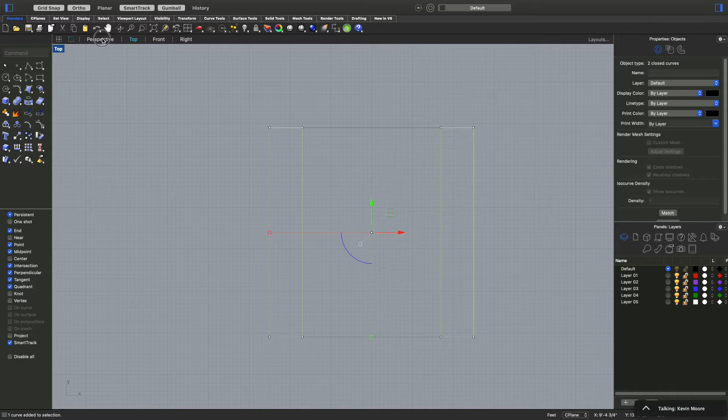You can select them both and go back into perspective, extrude them up, and maybe I'll do 2 inches.

Okay, and let's go ahead and maybe do a polygon. Why not? It still has straight lines. Polygon, 5-sided, sounds good to me. So number of sides you can change right there.

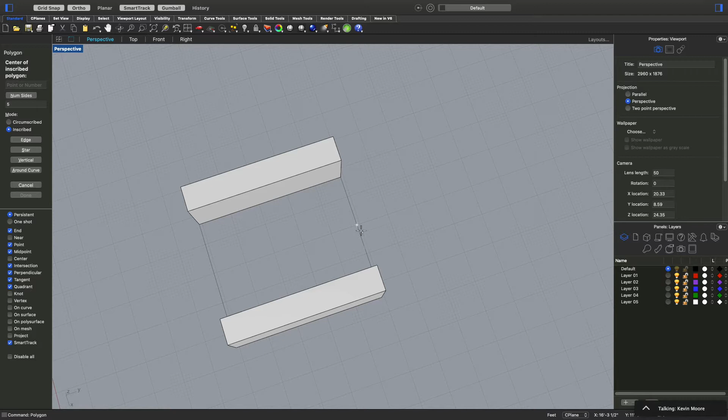Do it in the middle. And then extrude, curve up. Maybe make this 1 inch. I'm just keeping these basic dimensions, 1/2 inch, 1 inch, 1/4 of an inch. You don't want anything thinner than 1/8 of an inch.

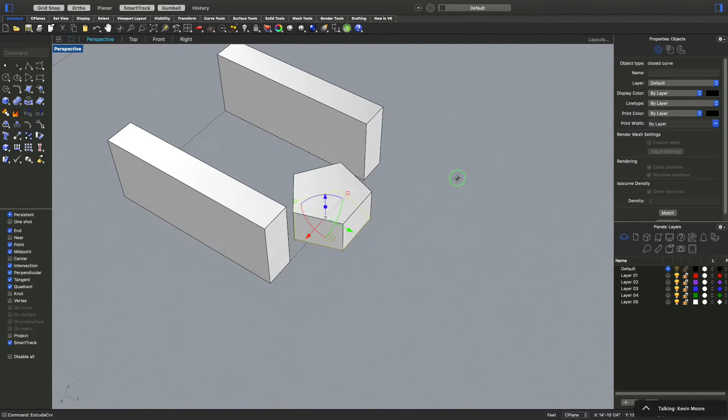And try to keep them kind of round, that helps too. So now I'm going to move this to the middle. The way I'm going to do that actually is move, enter, click on the object, enter. But don't click on the object to move it.

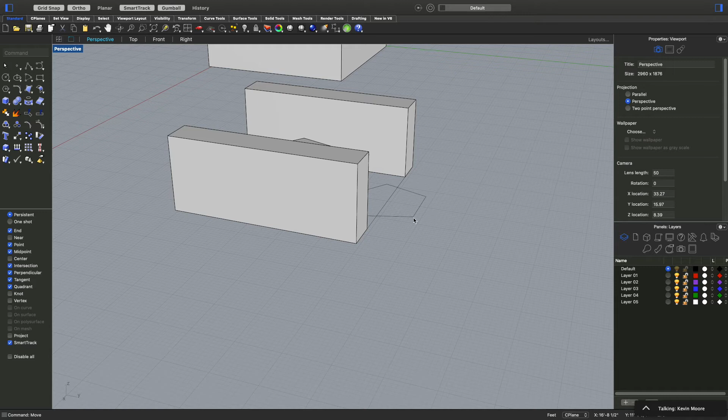I'm going to click over here, click from here, and then find my midpoint on this spot. That way I know I moved it to the middle. So I'm just displacing it by this point to the midpoint to get it nice and centered.

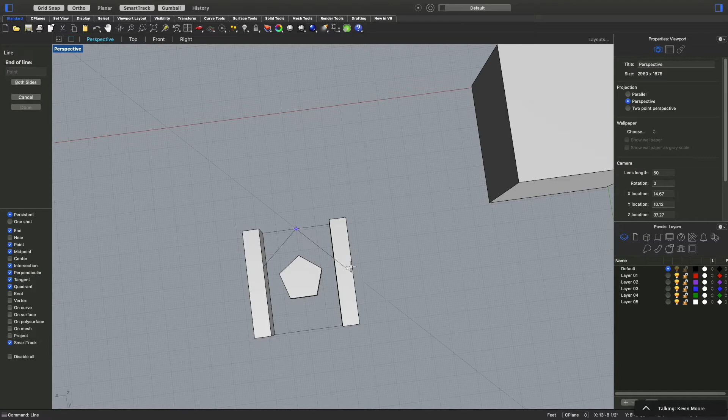Might want to do some more shapes. From midpoint here to midpoint there. See, my lines got all out of whack here. From midpoint to midpoint, midpoint to midpoint.

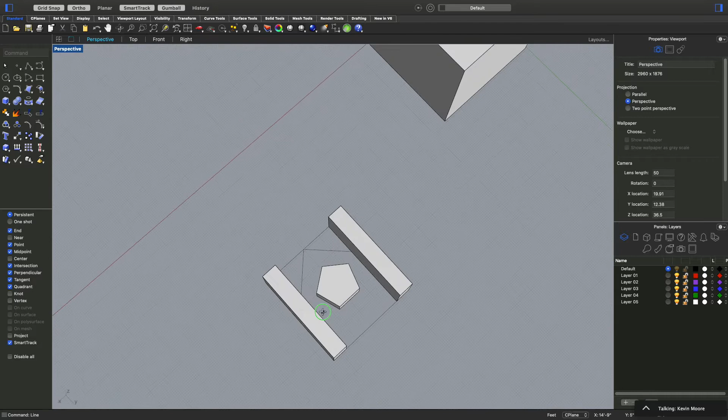I need to close these lines off, so you have to make a complete body. So I'm going to do a polyline, from this point here to there, enter. And then I'm going to join these two.

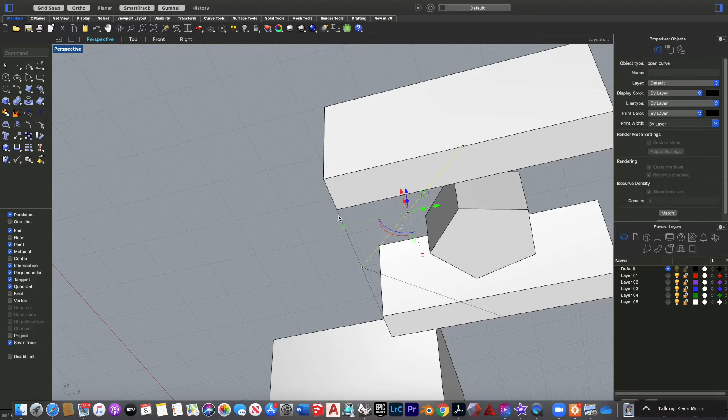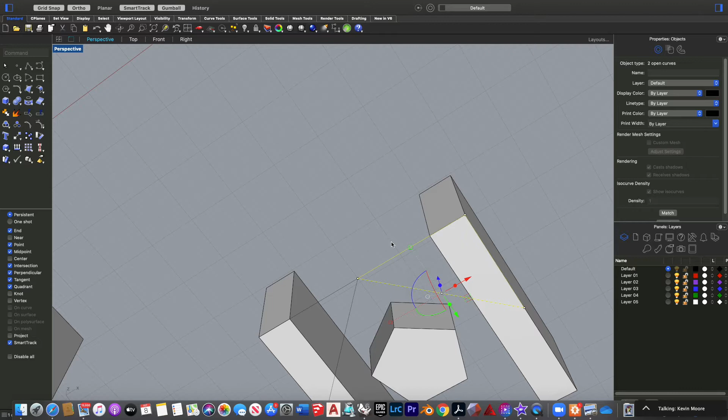You see when I click on this one, there's two lines here. So if I shift click to add to the selection, it gives me the option of which one to choose. This is the one I want. And then I'm going to join that together. I'll extrude that all the way up.

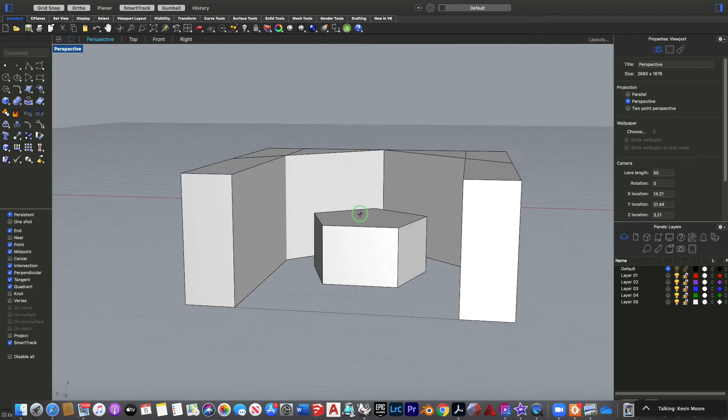And I can do that process again or mirror. All right, so I'm going to just take this simple form in here, and this is just kind of a trial. I'm going to Boolean union this together and make it all one piece.

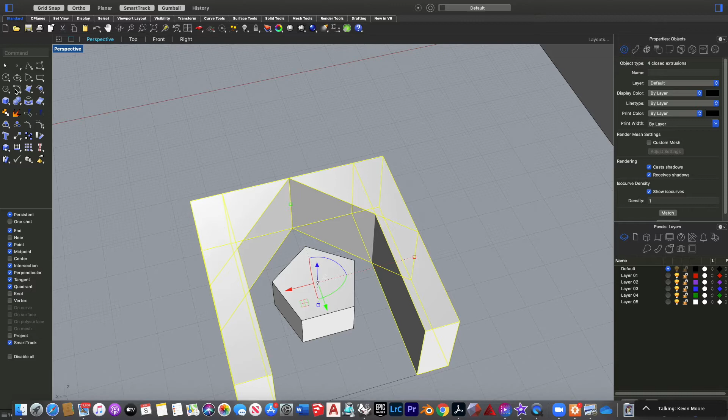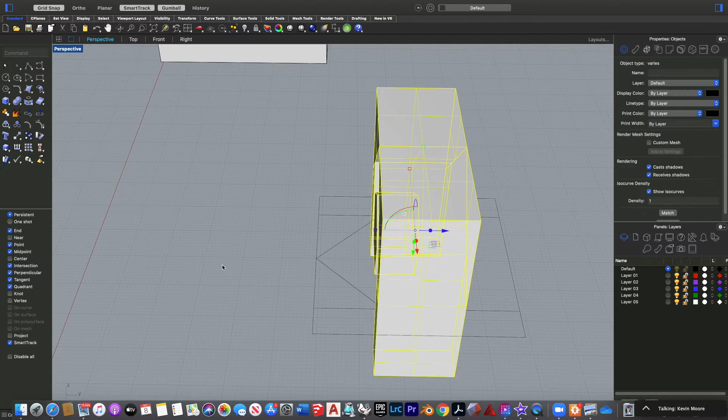So we use Boolean union, okay. And then I'm going to take these two, select them both, shift select, and I'm going to flip it up 90 degrees. I have my snap or my ortho turned on so it rotates properly. If you don't have ortho on, when you turn it off, it rotates at any direction, but if I hold down shift, then release, it gives you the same effect.

But I decided actually I also want to, I made this 5 inches I believe, so I want to offset it 1 inch. So I'm using offset, enter, or offset, enter, 1, enter, click.

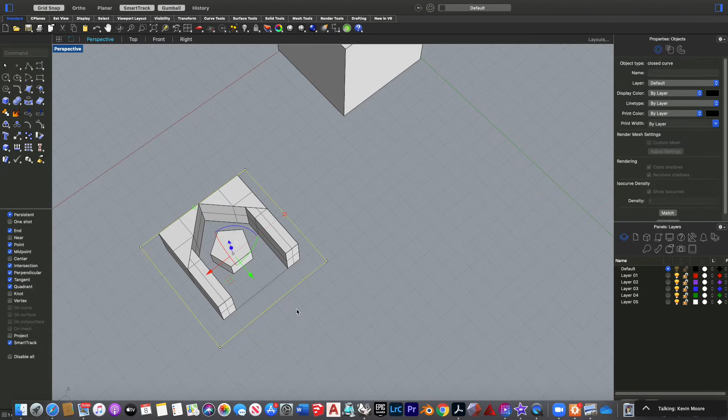Let's measure it, so use dim for measurement. Go from here to there. That's too much. Offset 0.5, enter, click there. All right, that's right. So now I can use these two together as guidelines.

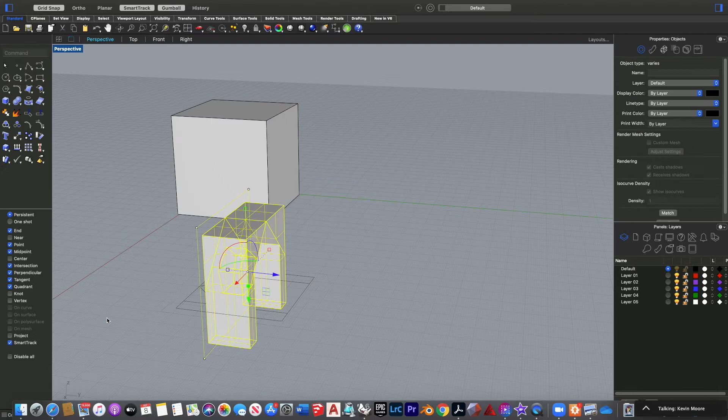So this, selecting that curve and the geometry, flip that up, shift click, and then I'm going to use that curve in conjunction with my object to move it onto one of the faces. So I grab that little edge right there on the curve, right there, and marry it up to right there.

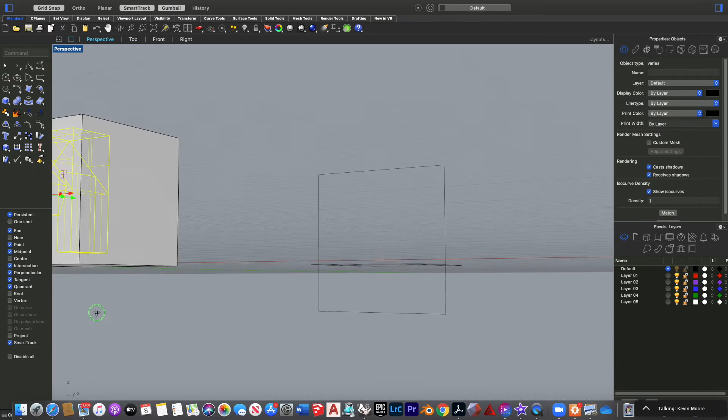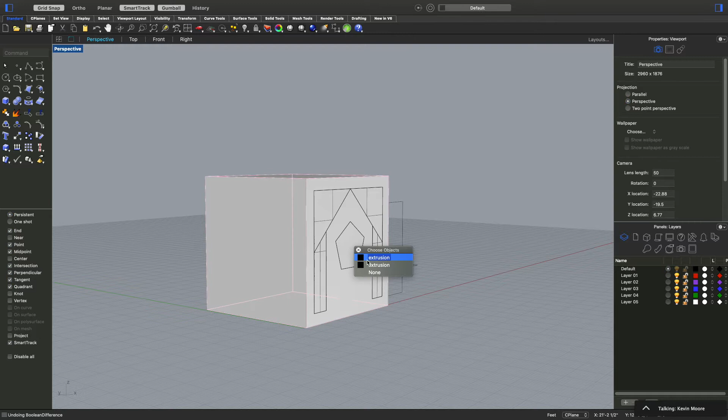Okay, and then let's Boolean difference. Keep this, enter, get rid of this, and this, enter. And sometimes it's a little problematic. It's okay though, if it doesn't work the first time, let's go to a top view and see.

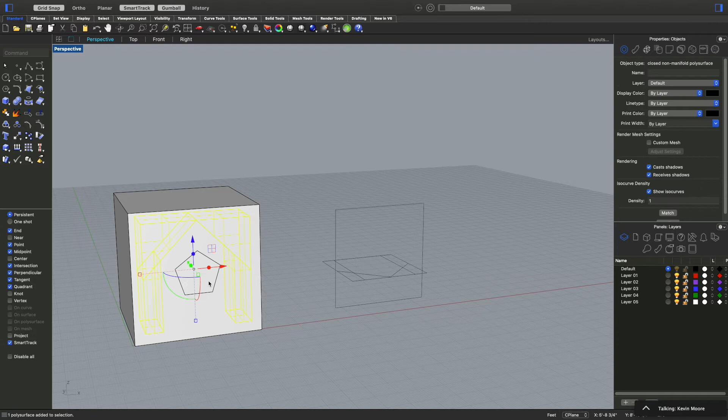So let's do it one at a time. Boolean difference: click on this to keep, enter, click on this to remove, enter. That worked.

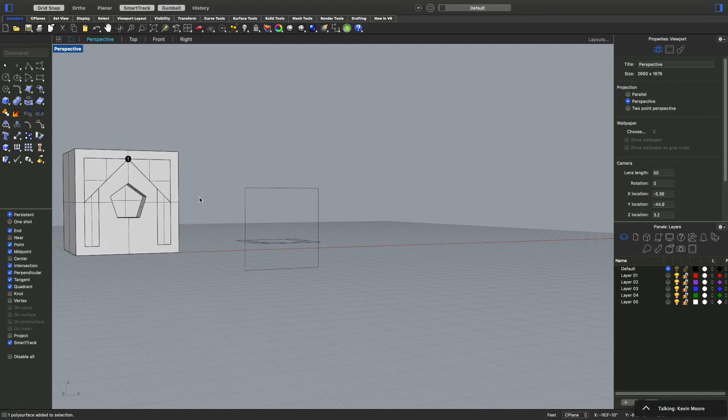Click on this to keep, enter, click on this to remove, enter. Does not work because this little section right there is meeting in a weird way. So let's go ahead and undo.

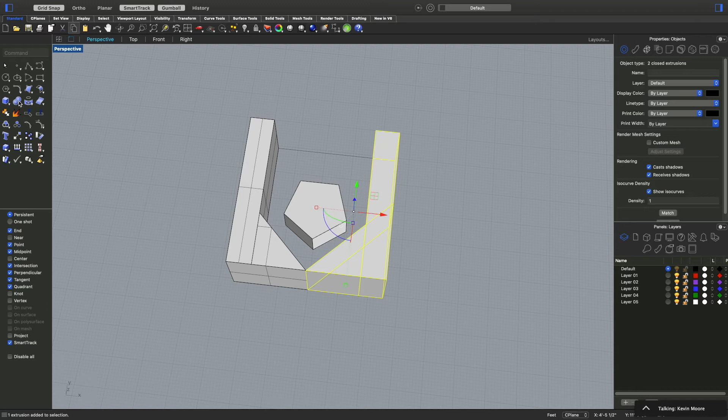It's fine as long as it's in 2 pieces. So if I Boolean union this together and Boolean union this together, I've got to offset this line again because I undid it. Just Command Z to undo. 0.5 still there.

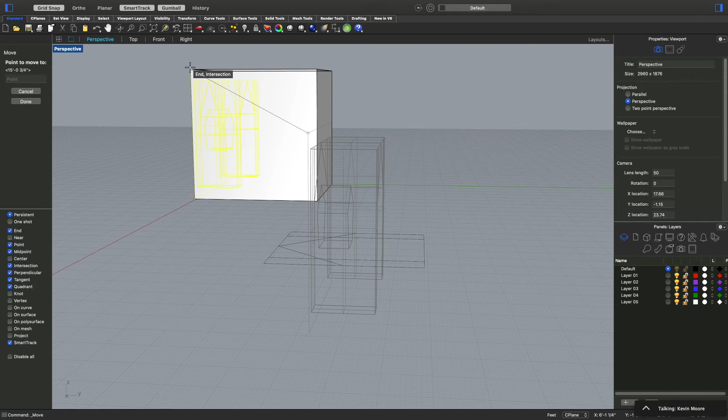Click on that, this, and this with shift. Flip it up, shift, move, enter, click there, click there. So I just undid it to get back to this point.

So now hopefully I can Boolean difference. Click on this, enter, click on this, enter. Click on this, enter, click on this, enter. Click on this, enter, click on this, enter.

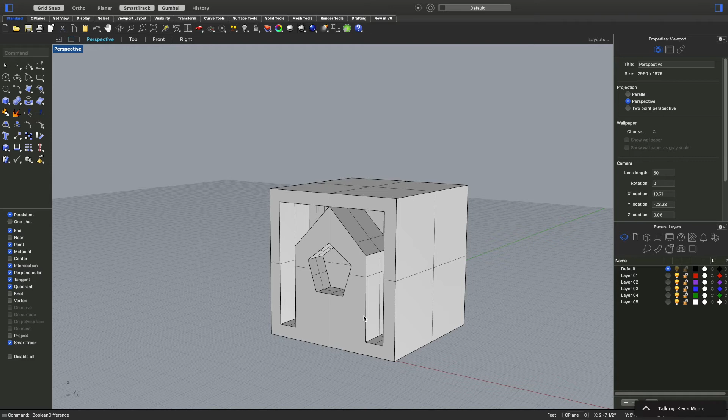All right, so this is what our positive of the mold is kind of going to look like. And I can see that maybe I want some more changes to be made, or we can do some things on different sides that will match up, meet up. Maybe we can even punch a hole all the way through here.

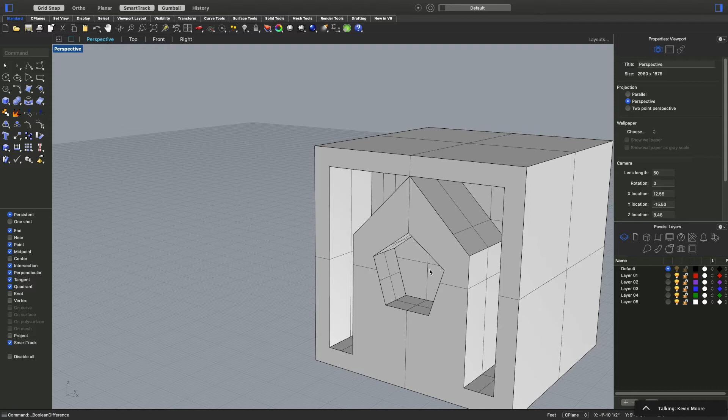You can actually do that by using the surface. So if I go Command Shift and then click, or Control Shift click if you have a PC - I'm sorry, I can extrude this surface by itself. Let's just do it that way.

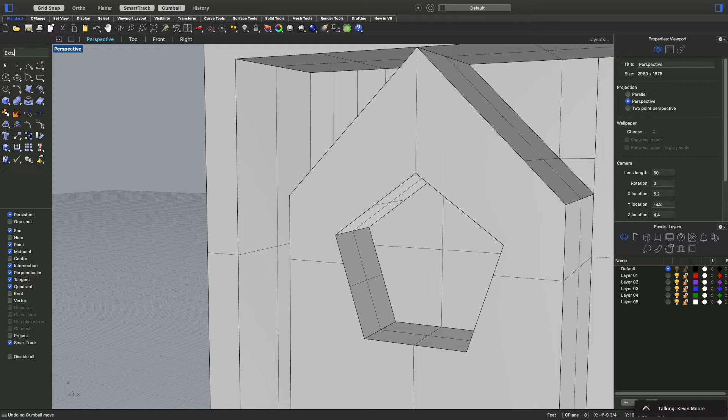Extrude. Instead of curve, we're doing surface. Select the surface, enter, and let's go ahead and just knock it all the way through. And then we'll Boolean difference it. So Boolean difference, click on this to keep, enter, click on this to get rid of, enter. And now you can create kind of a hole all the way through.

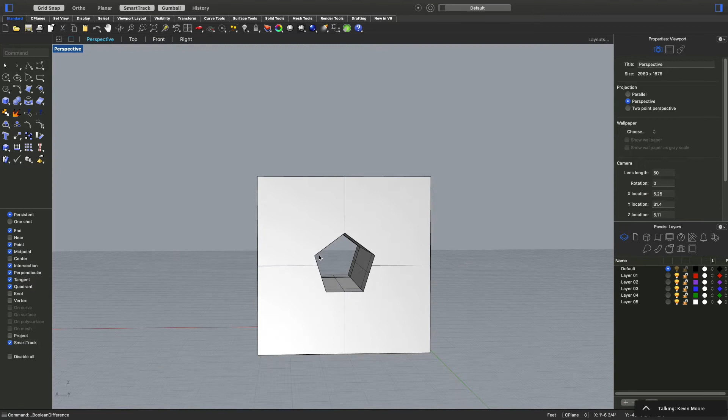And if you wanted the other side mirroring that side, you can do that. Or you can find some way of using that polygon in the middle in an interesting way. But you can also actually modify the edges of this object, and it should still work fine when we create the mold. So let's see.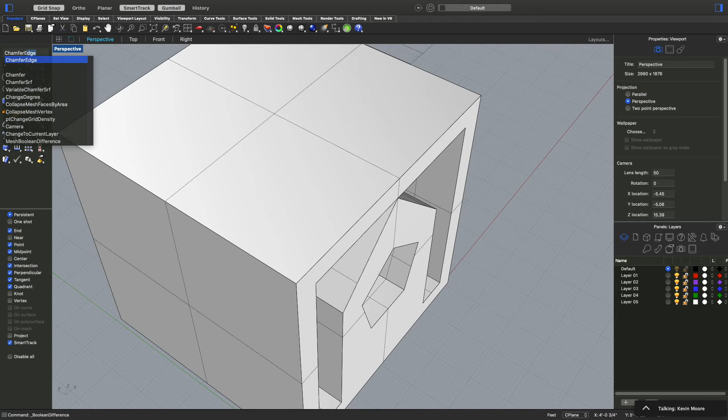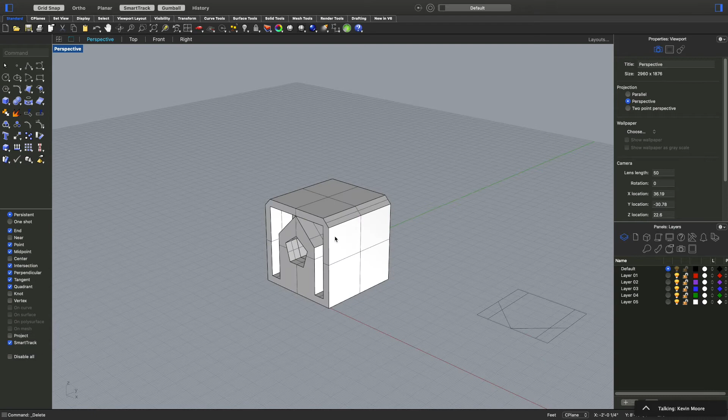If we chamfer edge, okay, so we can do that. Basically, anything we do where we have this form working, where it's a solid object, is totally going to work.

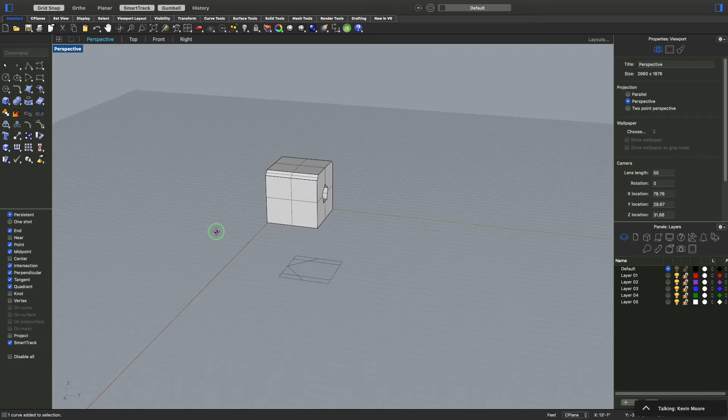So any form of stacking, just remembering to use as straight edges as you want. This could start out to be like a letter form, like an A, whatever. Basically, I would like you to try to take about 50% of this block away through subtraction.

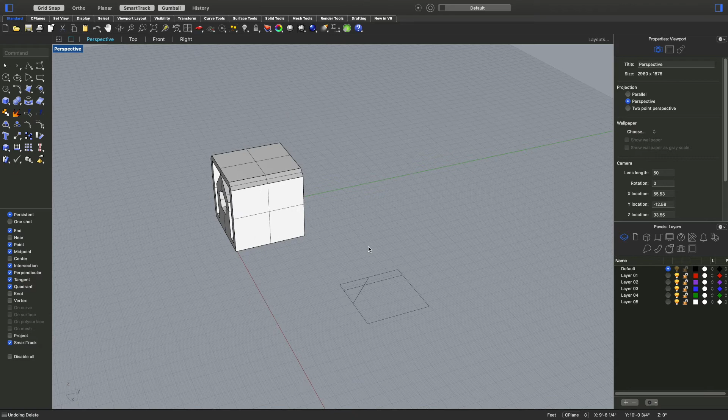Okay, so I'm going to keep making sides here, and while I'm making the sides, I'm not going to use anything fancier than extrude and mirror to make the sides, so I might speed through it a little bit.

All right, so I'm going to actually use a new tool called Trim here. So Trim, enter, and then it says select your cutting object. So I want to cut out these two lines, cutting them off right at where these lines meet. I'm going to select all 4 of these diagonals as my cutting line. Enter, and then click here to trim out those shapes. Enter.

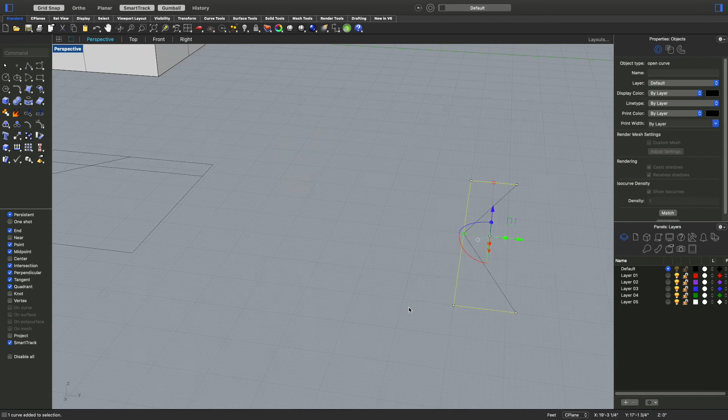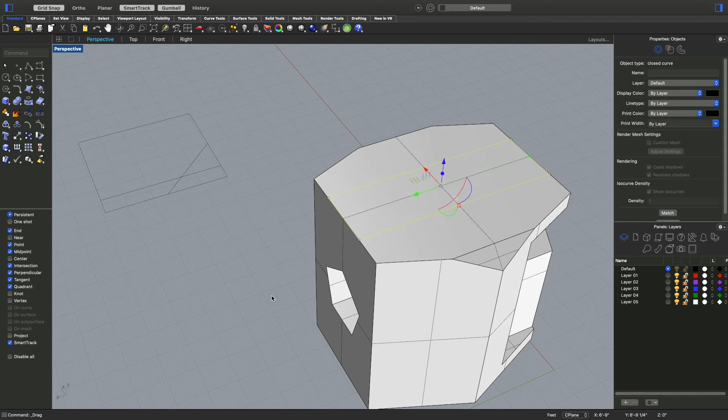All right, so now what I'm going to do is I'm going to start just chipping away at it, actually drawing on the surfaces and subtracting things out. So I'm going to draw a rectangle from here to here, curve, move it over to my midpoint, extrude it down 2 inches.

That's too far. I'm going to move it up an inch and move it up another half an inch. That's where I want it, right in line with that.

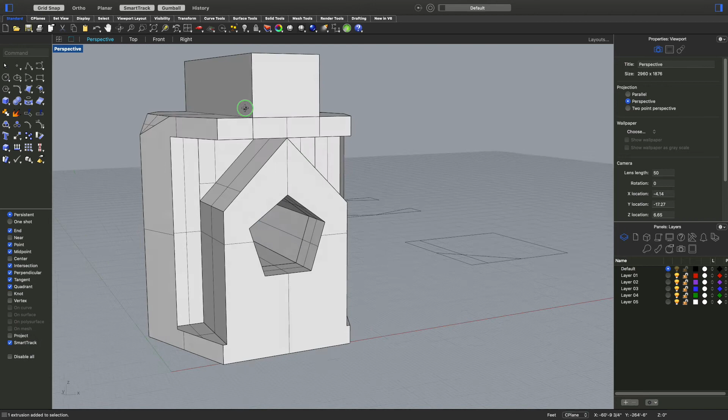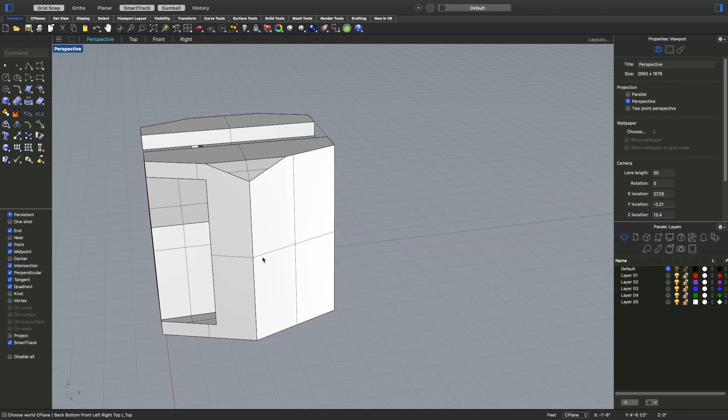All right, I want to talk briefly about construction planes too. So you see I've created shapes on this object that are no longer straight. So if I wanted to draw on this, it'd be kind of tricky. But what I can do is I can set a construction plane to be in line with that.

So basically right now the construction plane is in line for the top. You can see the grid is oriented towards it. So let's go ahead and right click here, or if you have a PC, the little drop down arrow there. And we'll set the construction plane, and in this case I'm going to do a 3-point.

So I'm going to click on that, and then if I click here, here, and there - 3 points - I've now aligned my grid with that. And so if I start to draw, I'm on that axis. Makes it really easy to take this shape.

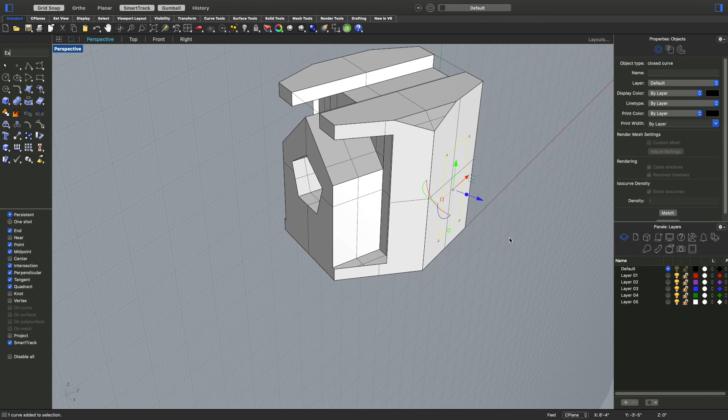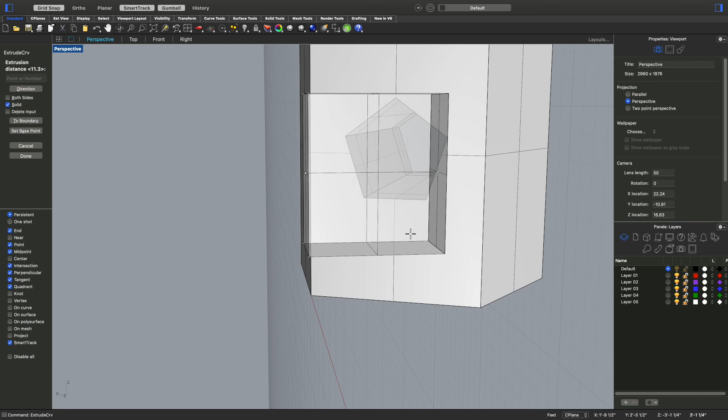Extrude it in... don't want to go all the way. Okay. And then I'm going to mirror on the other side. Oh, now you can see my construction plane has got my mirror all messed up.

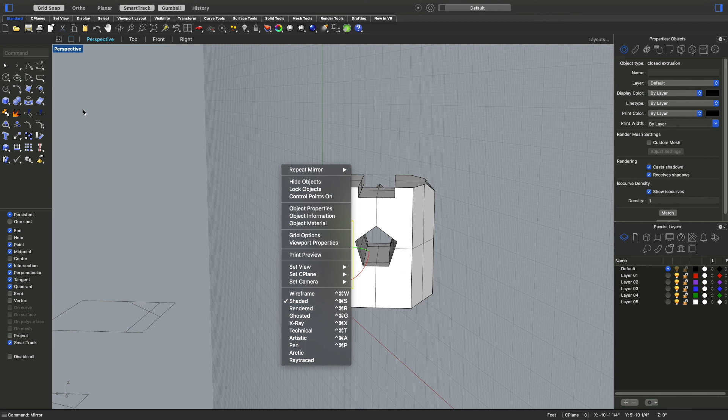So I've got to reset my construction plane. Right click if you're a Mac person, or the down arrow, and then go world top. And there you go. So now if I go mirror, find my midpoint to my midpoint, or hit shift, I can Boolean difference out those shapes.

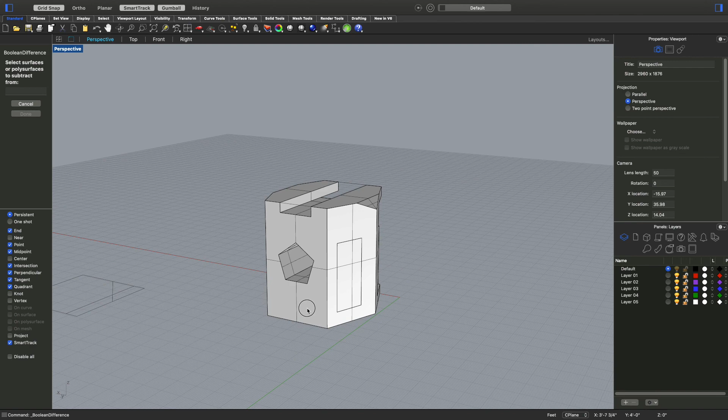All right, I mean, I would probably add a little bit more to it than this, but this is kind of a basic model, and you can see all straight lines, some kind of cool geometry, and the next step is going to be actually to make the mold of it. So we've got the positive shape, we'll make a negative shape.